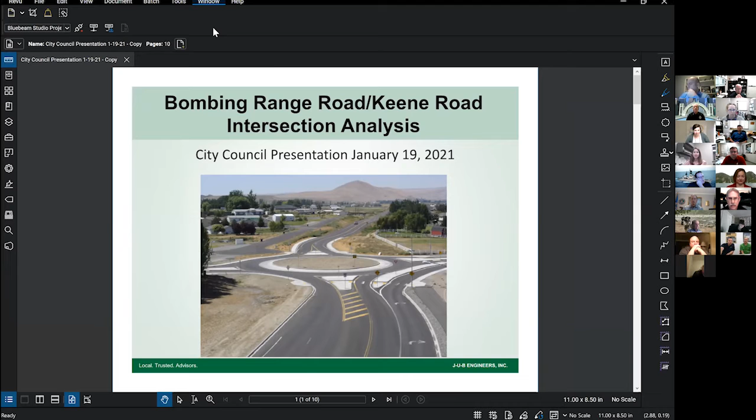I'll go ahead and share my screen here. Close that. All right, I see it, Travis. All right, let me turn this into presentation mode so it's a little bit bigger. All right, everyone see that?

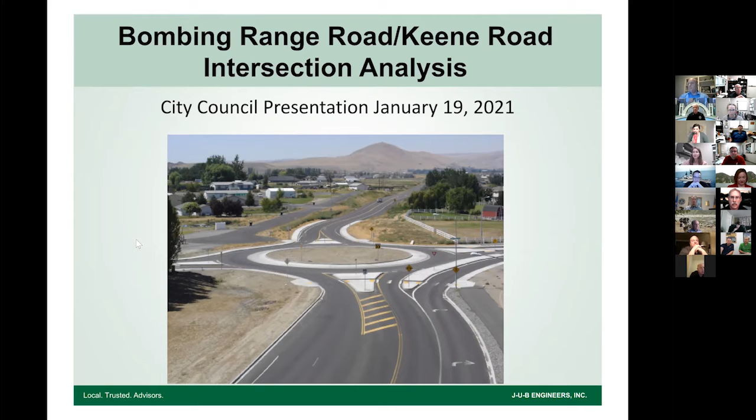Okay, well, yeah, thanks for having us. My name's Travis Martin with JUB. This is Spencer Montgomery, also with JUB. We're happy to present the Bombing Range Road, Keene Road intersection analysis and our preliminary results from our study. As everyone knows, this particular roundabout was constructed in the early 2000s and really has served this area well over the last... starting to break down from some capacity issues on a couple of the legs. And so we're here to discuss that, discuss improvements to it and what we found.

So Spencer's going to go over the forecasting that was done, some of the work that we did and some of those results.

Well, good evening. Looks like Travis and I are sitting real close together, and we are. I think I'm immune now because I had my turn with that virus. But we have a plexiglass partition you can't see between us.

So we want to just inform you a little bit of the work that we've done so that you can understand how we got to where we're at today and kind of the decisions that have been made, and get any feedback or answer any questions that you have.

So we gathered as much information as we could get from the city that was available. And I'm going to start with this third bullet. It says Red Mountain Center development. That was a development that was discussed with the city and did some studies last year. Available as part of that was information here in this first. They had done some turning movement counts in the morning and afternoon pre-COVID. And so we felt like that was the best information to use rather than go out and collect new traffic data that would have traffic restrictions from COVID.

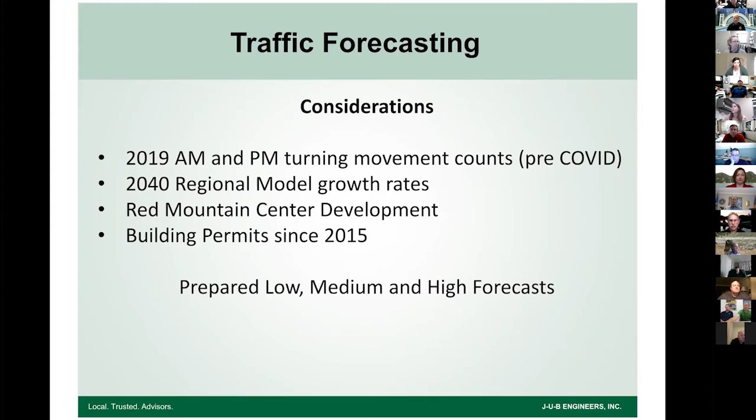We also looked at the 2040 regional traffic model that's prepared by the Benton-Franklin Council of Governments. So they have a base year model from 2015, and they use existing land use and calibrate that model, and then they look at what future land use demographics will be with respect to housing and employment, and then the model predicts what the traffic volume will be within calibrated rates from the Federal Highway Administration. And so the model shows that this intersection is going to grow about 1.5% per year average over the next 20 years or so.

We also looked at the Red Mountain Center and how much traffic that was supposed to add to the roadway network and how well that was accounted for in the regional model. So the model accounted for about 20% of the development that's being proposed by Red Mountain Center. So we had to make some adjustments to account for that.

We also examined the building permits that had occurred since 2015 and compared that against how much you might have anticipated based upon the regional model. And that was pretty close. It's a pretty healthy growth rate. There were 443 new households that had received building permits, which is about 20% of the 2,175 that was included in the regional model.

So we looked at all those things and we prepared a forecast, and we called that the high forecast. That was kind of the first one we did. And we said, well, what if we're a little too aggressive? And so we prepared a couple of other ones, a low and a medium forecast, just to allow some sensitivity with some of the alternatives that we were looking at, and I'll explain those different alternatives to you here shortly.

But just for some perspective, the intersection in 2019 had just under 2,400 vehicles during the PM peak hour. And our low forecast had 3,150. Our medium forecast was 3,550, and then our high forecast was about 3,800 vehicles, which is about 160% of the existing.

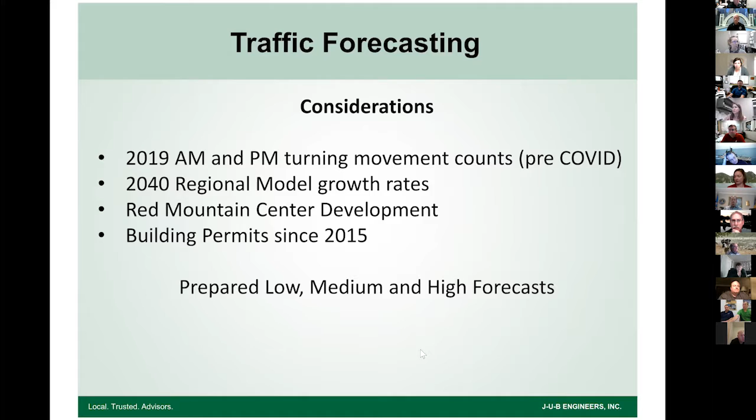Just go down that way. So Travis is going to talk a little bit about some of the alternatives we developed. Yeah, so as a result of the traffic projections and the modeling that was done, we developed several configurations to help reduce the congestion and the capacity issues that the existing roundabout is seeing.

Speaking of capacity, roundabouts typically serve off-peak traffic way better than signalized intersections, but of course, signalized intersections tend to handle the on-peak traffic way more effectively. Some of our intersection options we developed, we looked at the right-of-way needs of both. Roundabouts, in this case, due to the size that we need, had more right-of-way impacts.

And safety. Roundabouts are typically safer intersection control methods. When there are accidents, they're really slow speed, fender bender type accidents, whereas signalized intersections are typically a little higher speed, more T-bone type accidents. But we took all that into consideration as we developed our alternatives.

The roundabout alternatives that were developed, we looked at 3 various sizes of roundabouts. And the size really helps with increasing the distance between the legs, which gives you a little bit more time for your entry movements, gives you more gaps in traffic.

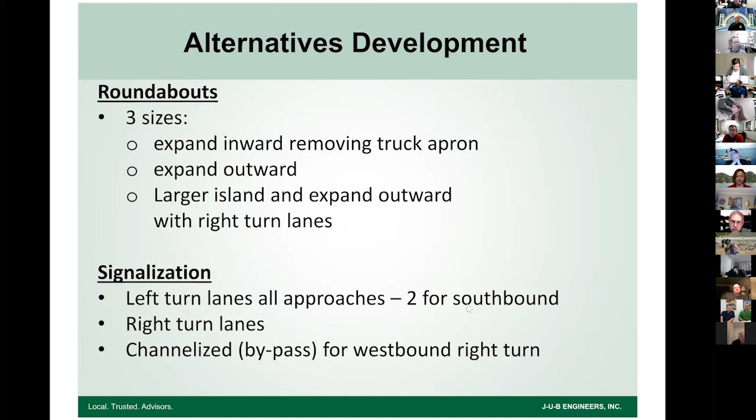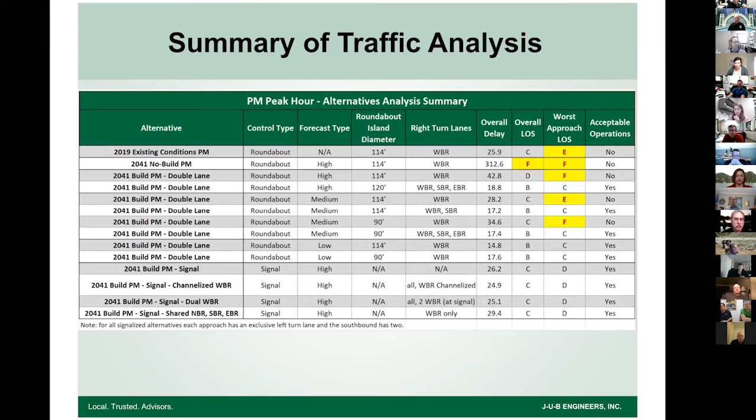Spencer, you want to talk about the actual traffic analysis summary? Okay, this is a summary, and there's a lot of information in this table. We prepared a memo for your staff that has a 3-page large size table that includes tons of information with respect to all the traffic volumes, the delay, the level of service for every movement at the intersection. But we felt like this is a good summary that helps to highlight kind of a progression of how our evaluation went.

So this top line right here shows the existing roundabout, the single lane roundabout. From the outside of the existing, it's 114 feet in diameter. It has WBR, which stands for westbound right turn lane. That's what we call a slip lane sometimes. It's a free flow westbound to northbound lane.

So today in the evening, and I should mention that all of this is PM peak hour analysis. What we quickly learned was that the PM was worse than the AM in every scenario. So we kind of focused in on the PM to make sure that if we could accommodate the PM traffic, then the AM would be well accommodated.

So today, there's about an average of 26 seconds of delay for every vehicle at the intersection for an overall level of service C, which is good. But the worst approach, that southbound approach, has level of service E. And the reason why that approach is getting worse and worse is because at a roundabout, they have to wait for the westbound through movements. And that westbound through movement is growing as development continues out to the west. You get more westbound throughs. And so the southbound entry has to wait for the gaps.

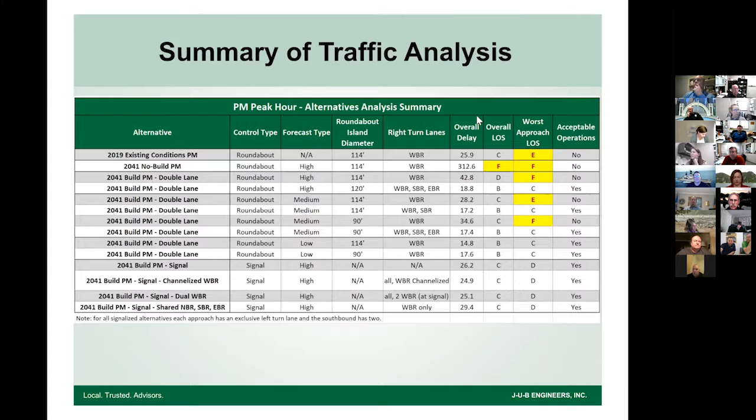Skip 2. Okay. Oops, it did skip 2. A little delay. Okay, I might zoom in here a little bit too. Well, I'll touch just on the major aspects of it at this scale. Can everyone see this clearly, or do you want me to zoom in? Travis, I also emailed this out to council, so they've got emails of these exhibits too.

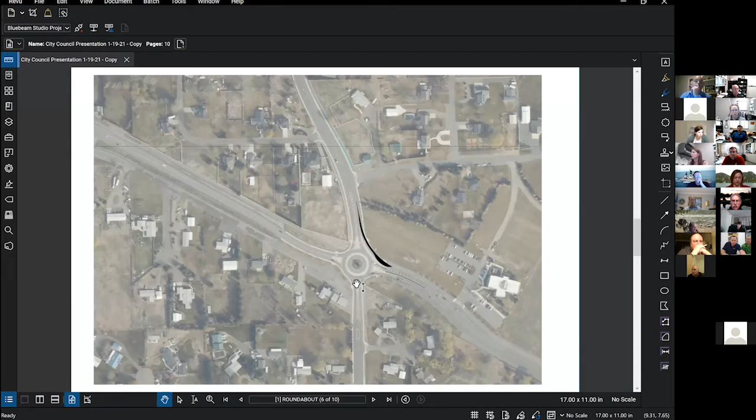You didn't show them that. Let's see if I can zoom in. I'm trying to zoom in here, but it won't let me zoom in. Yeah, it won't let me zoom in on presentation mode. Oh, well, now I did it. Well, anyway, it won't let me zoom in right now. That's fine. As Roscoe said, council's got exhibits on that, so okay, that's fine. I'm scrolling to the next one. There's just a delay here. Okay. Just explain that weave to them on the north leg. For the signalized intersection. Well, I think it shows up better for the roundabout though, actually. Well, there's such a delay.

So this island between the roundabout northbound exit and the right turn slip lane, the island between the two will end about here, and then the striping starts. So currently today, there's very little room before that very right lane ends before East Lattin. So there's people coming through the roundabout trying to make a right on East Lattin, people coming from Keene wanting to continue north on Bombing Range. There's a big weave through there, and there's not much room.

And so that was one reason why we continued this further. So if both lanes are coming in and wanting to merge into Bombing Range, we got way more distance to make that weave happen, so they're not just trying to do it in the short distance just north of East Lattin. Is there anything you want to add to that? Yeah, well, so there's two aspects of that weave. One of them is if they're coming eastbound and they want to go north and then turn onto Latin, they have that short distance to move over to the right.

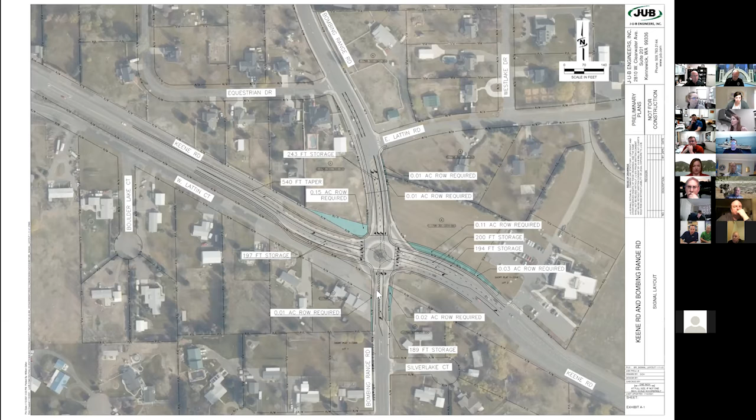So the signalized intersection is fairly similar. In this scenario, we're able to reduce the width of the north and south legs, just given the signalized intersection layout. We're able to reduce the northbound exit to one lane. This does not need a right turn slip lane because the right turns, as Spencer mentioned, get a lot of green time with the various other signal timings. We've got a lot of storage eastbound and westbound.

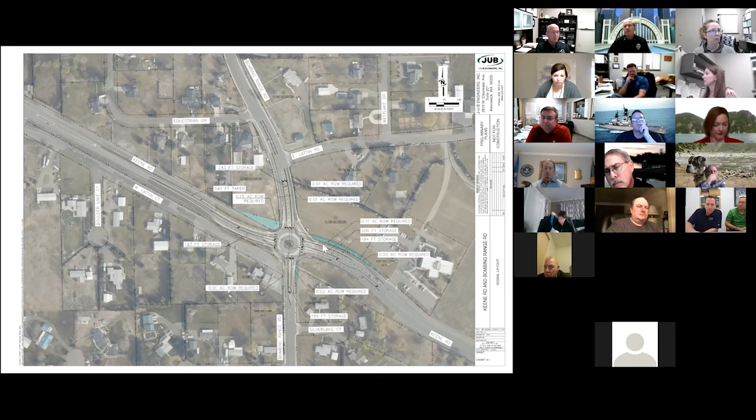We kept the right turn lanes. They don't really need to be this long for capacity reasons, but during peak hours, the through traffic will back up. And so these right turn lanes are set far enough back where cars can still enter those right turn lanes even during the peak times. The westbound right turn, we actually maximized even further. We're going to start that just past the Kadlec Clinic sign here to maximize how much room is available, so if that ever does back up beyond where the model shows, there's still room for that right turn traffic to enter that lane and make the right turn.

As you can see, the right-of-way impacts are far less than the roundabout option. We need a little bit of right-of-way down in this corner for pathway relocation and storm facilities. But otherwise, they're small strip takes. Kadlec in their open field has probably the greatest, other than the northwest corner. Very small acquisitions are going to be required for this option.

And we're basically finishing all of our improvements at East Lattin. So now there's just one lane. There is no weave. Right turn lanes aren't an issue. And the left turn into East Lattin basically remains the same. So our construction limits are a lot less. We don't impact the entrance into Kadlec. Our improvements stop just short of that. So there's a lot of benefits to this layout. Are there any questions on either of those intersection configurations and layouts?

Yeah, I have a question. On this map that you have up now, the northwest corner easement acquisition, maybe I missed it. Are there right-hand turn lanes in all directions planned, even with the signal, or not? Can you go over that again? They're not dedicated right turn lanes in this scenario. Northbound and southbound have a combined shared through and right turn lane. The numbers in the model do not show that we need dedicated right turn lanes. Do you want to expand on that?

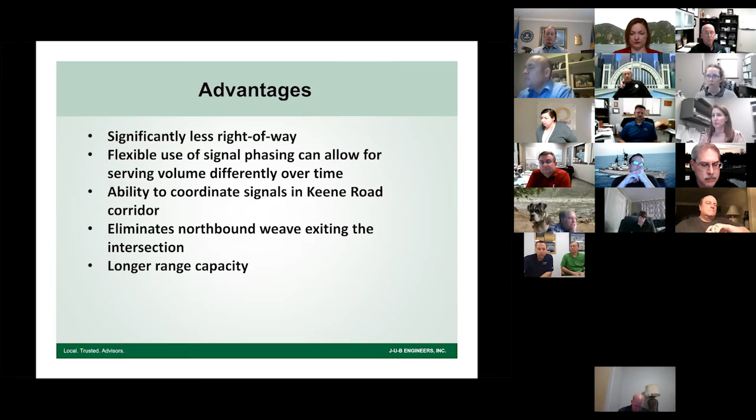That's the end of our presentation, Roscoe. We breezed through the end, so if we want to discuss. Let's go ahead. This is Brent. I see Mayor Pro Tem Brink had his hand up, as well as Councilman Fetto and Councilmember Moran, and Councilman Boone and everybody. If you'd like to go back to any of the maps, please designate which one you'd like to see if you had questions on that particular item when I call on you. So we'll start with Mayor Pro Tem Brink. Thank you, Mr. Mayor. Mr. Martin, Mr.

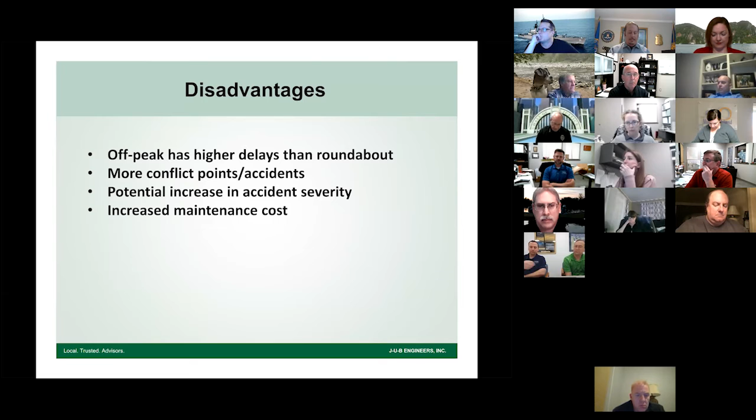Montgomery, I appreciate the presentation. I don't need any maps. I do have hard copies in front of me, but obviously what stands out to me initially is the much larger footprint of the roundabout layout versus the signalized intersection. I will share this with you.

I live off of East Lattin Road, and I typically travel maybe once, possibly twice a day, eastbound on Keene Road, where I have to go through the roundabout and then go north and jockey over to the right-hand lane to East Lattin. As you undoubtedly know, there are a couple hundred houses between the lakes and the mountains area and other areas back in that region.

It would be impossible with the roundabout design to go right on East Lattin, and the next opportunity to go right is at North Lake. That design, I think, would cause a significant inconvenience for a fair number of people. I see the signalized intersection, though, as having a much smaller footprint. And that's the one that I lean toward based on your recommendation as well.

Can you answer this? Is there any estimate for the comparative costs between the two designs? Or is that not appropriate to ask at this time? We're still developing those and based on the direction council gives us, we will be refining and preparing those, but we don't have those ready yet. Okay. But rule of thumb, Councilman Brink, is typically roundabouts are twice as expensive to build than signals. All right. I'd go with the signalized intersection as my preference. That's all I have.

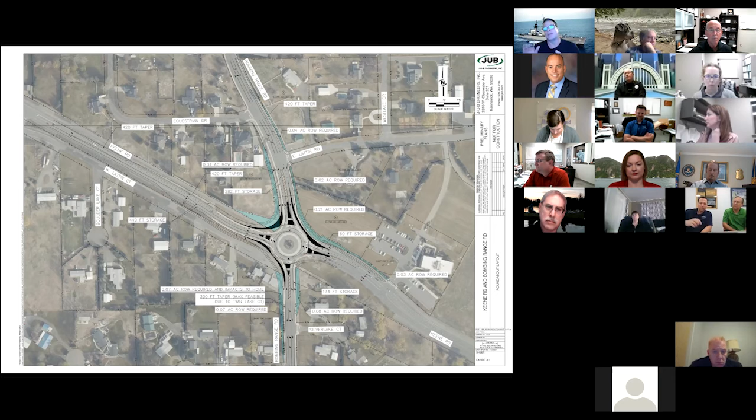Thank you, Mr. Mayor. So I'm in agreement. Of these two options, the signal is definitely the better one. I don't want to have to displace somebody. It doesn't look like you can make this thing work and not run into the house there on the corner. On the signal, the problem at Kennedy and Keene, I know there were some accidents turning left, right? But there were a lot of accidents, Roscoe, of people making right turns in with traffic and getting hit from behind. Was that also on the report you gave out?

Yeah. So people were pulling out in front of people. Right, yep. So going north on Bombing Range, what's the field of view look like making that right-hand turn? It looks like the turn is inside of the corner of the other traffic.

I mean, it's hard to see on this, but are we gonna have an issue with sight? People making a right-hand turn too quick and not seeing people coming down Keene? I'm not following the turning movement. So if you're making a right-hand turn, so going north on Bombing Range into the intersection, making a right-hand turn on Keene, what's the sight gonna be like looking back left on Keene, looking west? So eastbound traffic on Keene, northbound on Bombing Range, make a right-hand turn on Keene headed towards Richland.

Yeah, okay. That corner just looks like it sits lower, and maybe there'll be obstruction. Well, there'll be sufficient sight distance for the posted speed limit. But that movement you just called out, I don't even think we'll have 3 cars making that turning movement. Anybody that's going that direction will turn at Kennedy to head that direction. That's why it didn't have its own right turn lane. There's just not cars making that turning movement. But for whatever the posted speed limit, there'll be sufficient sight distance.

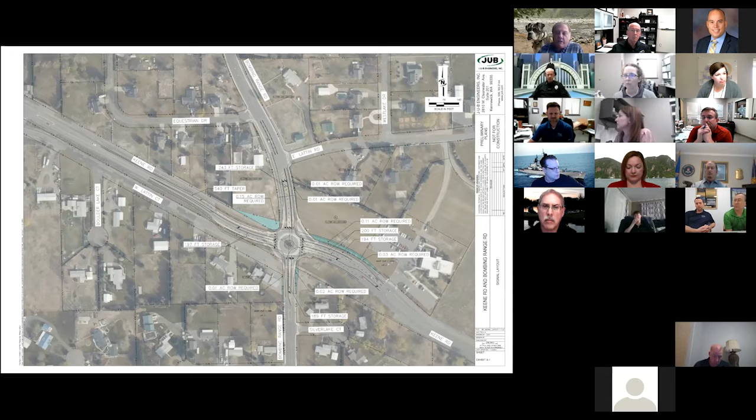Thank you, Councilman Fetto. Councilman Bloom, sir. Yes, I guess my question is more bottom line. What would be the worst case cycle time that you would see on this intersection with the lights? Well, what do you mean by worst case cycle time? Well, you said at the intersection of Quinault and Columbia Center Boulevard, that's an eternity light, for the entire cycle to repeat, assuming the intersection doesn't clear. The cycle length, how long does it take for it to go all the way around? Yeah.

I don't have those numbers in front of me right now, but those can vary throughout the day. Well, but I'm looking at, you've got peak times, and looking at the flow, you're assuming peak traffic is either through the intersection or left turning off of Bombing Range going towards Richland. Right. Well, there's a balancing act, and that specific timing hasn't been set up yet. We did run some with signal optimization to maximize the flow of the intersection. But because of that southbound left turn, the signal cycle is going to have to go around fairly quickly. There's a balancing act with that.

The longer your signal cycle, the more overall capacity you have at an intersection over the course of an hour, and so there is a little bit longer wait overall. But the shorter the cycle, the quicker people get their turn, right? But the shorter the cycles, the more all red time you have. For safety purposes, they have a second of all red at every change of the phasing. Hey, Travis or Spencer, with these level of service that you show, it has a delay, and that delay is an average delay? Was that on that table? It's the average delay that we've got on the sheet that was given to you there.

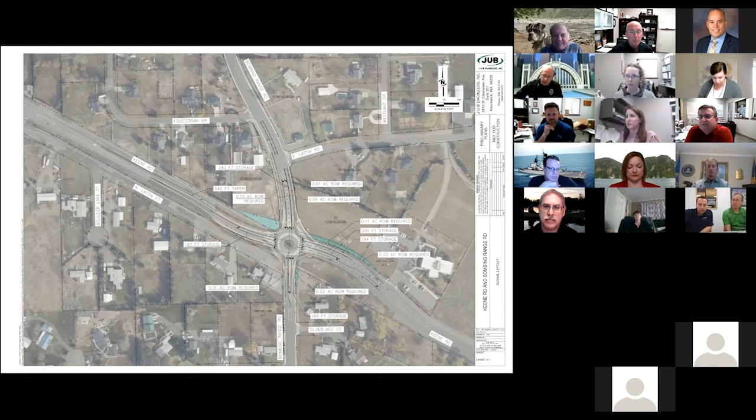So I guess, Spencer, without having this designed or gone through the programming to know what a typical delay for the time of day is, would you assume that your delays off-peak would be less than your overall delay? Or is that already factored into that number? I would expect off-peak delays to be considerably less. Okay. Was a signaled roundabout considered? I mean, that was the semi-solution at the 240 interchange that they put in at Columbia Park Trail. Yeah.

You're asking if they considered a signal there? If we consider signal. They've signaled. They have a signal coming off of Columbia Park Trail into that roundabout now. It's a delay signal like you have on freeway entrances on the interstate. Right. Yeah, they call that ramp metering. Yes. Right, or metering, and what that does is it creates some gaps for the other legs of the intersection. If you have one leg that kind of dominates a roundabout, that's one of the fixes, so to speak, that kind of introduces gaps.

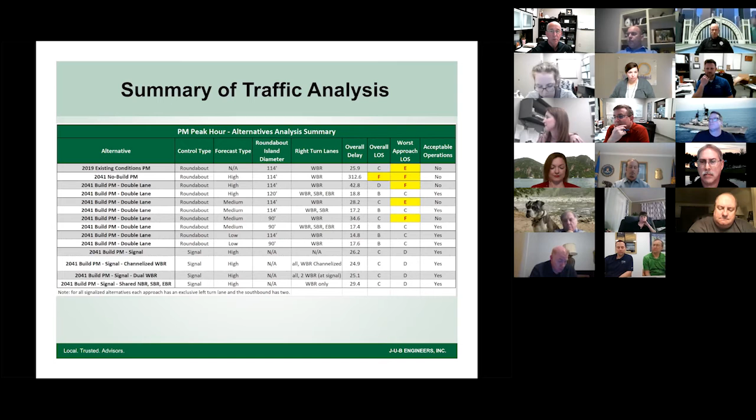Thank you. So Roscoe and JUB, I think you got a consensus of the direction that we need to go with this. So with that, anything else, Roscoe? Just next steps. So thanks, Travis and Spencer, for the presentation. So council, next steps is I'll be working with JUB now that we know what we're going to be designing for, negotiating the next phase in their contract to actually put the design together and look at the right of way. And so you'll see a contract amendment for them at a future council meeting so they can continue this work going forward. Again, the goal is to get it designed, right of way acquired, all the environmental permitting complete, so it is truly a shovel-ready project that I can go after federal or TIB money for construction.